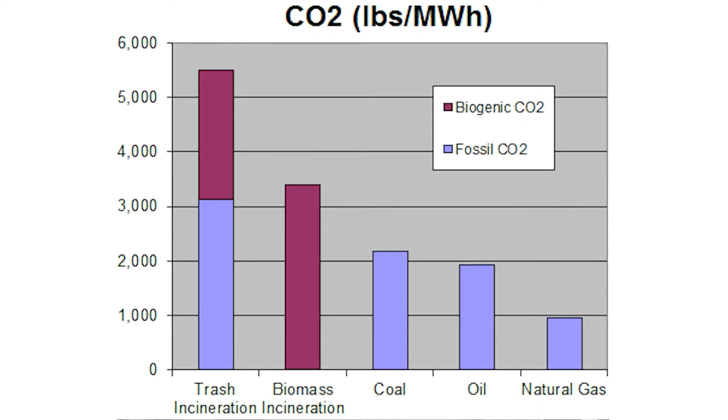I'll be talking about the literature review and design concept process. For the first part, the literature review, we have done some research on articles related to our project. Andrea Thompson stated in 2014 that in this modern world, 40% of the world's garbage is being burned in open pits, and 40 to 50% of garbage is made up of carbon, which means that carbon dioxide is the major gas emitted by trash burning, and we know that carbon dioxide is very dangerous for our environment.

He also stated that trash should be burned in an appropriate manner, and if possible, it should be burned in a way that can be useful, such as burning it to generate electricity for human use.

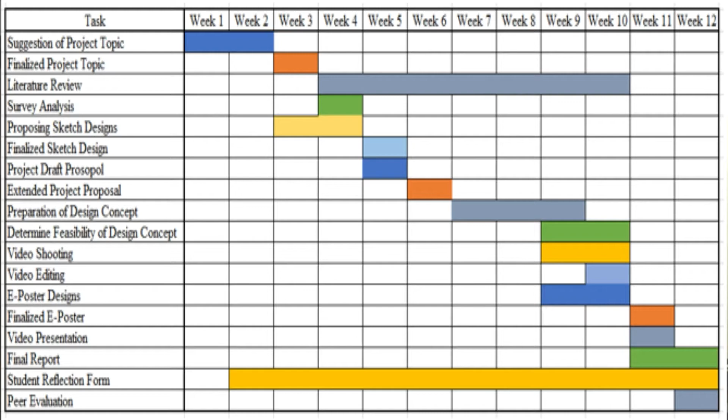So, for the project planning part of our ETP, our group leader suggested that we divide the tasks amongst ourselves according to our strengths and weaknesses to ensure smooth workflow. The tasks that were distributed among us are as shown. We also did a Gantt chart. This is to ensure that everything can be done on time, and it is proven because all of the things that we had done are on point with what we had planned.

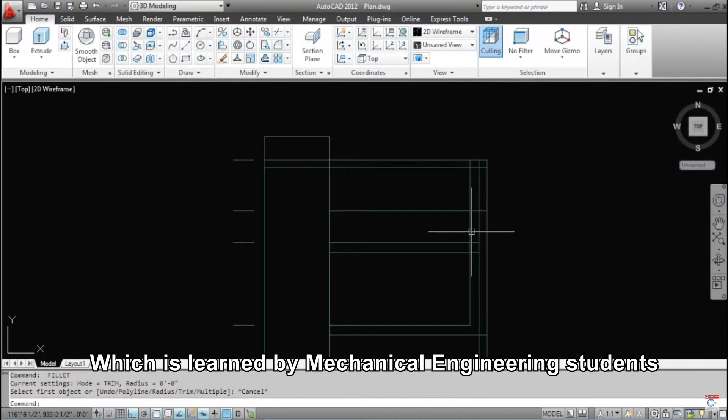For the design concept process, we started by sketching it on a piece of paper so that we could allow modifications and features to be added into the design. After we came up with the full idea of the design for our product, we used AutoCAD software, which is learned by mechanical engineering students, to make the design in a three-dimensional view. By doing this, we allow other people to understand our product better because AutoCAD allows the user to see the product overall in a 360 view.

For the animation part, we used Adobe Illustrator and Adobe After Effects, which helped us make a video for a better understanding of how the product will work. Thank you.

I will be talking about the methodology of the clean trash cookstove. A certain amount of trash will be put into the combustion chamber, but trash made of rubber will be excluded as it will release very hazardous gases when burned. This trash will act as the fuel. After that, a match or a stove lighter is used to start the combustion, and the oxygen is gained through a funnel that will also act as the filtration system.

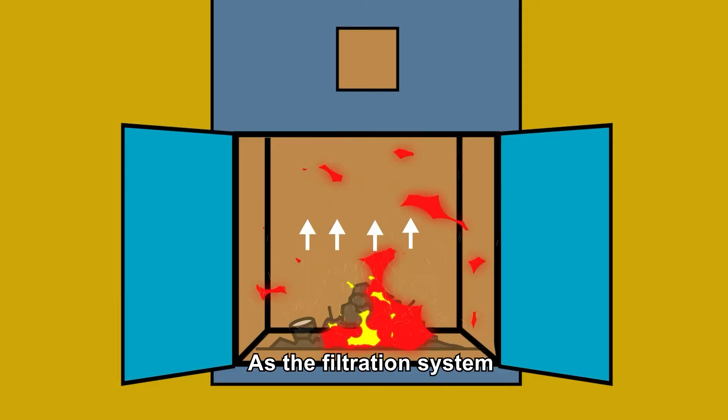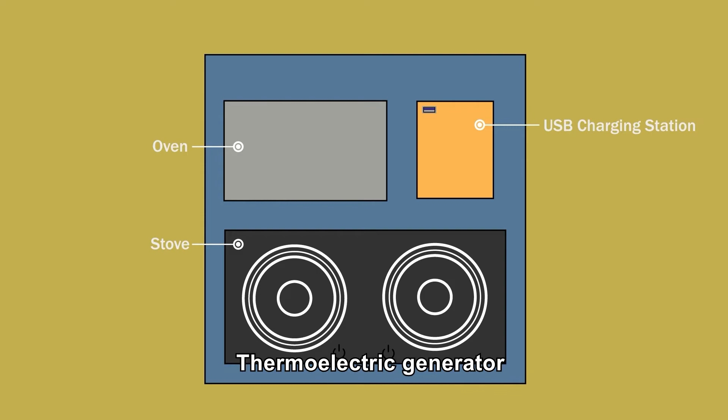The second part is the heat conduction. Heat conduction is one of the ways to transfer heat. The heat generated by burning the trash will be transferred through the copper medium to the stove, mini oven and also the thermoelectric generator. And all of these three components can be used. When a component is not in use, an insulator will be put between the conductor and the component to stop the heat transfer from continuing.

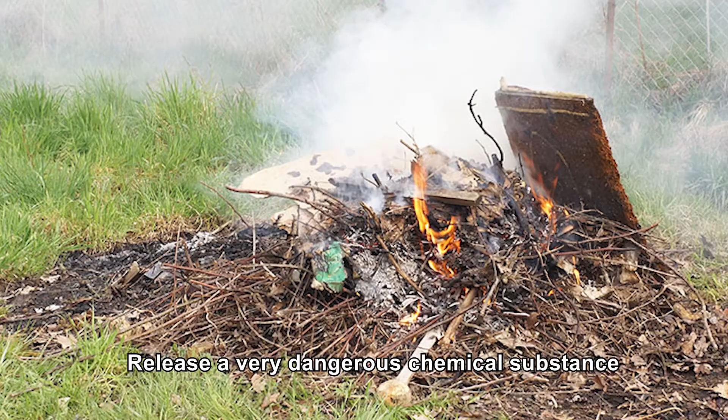And the last part will be the filtration system. As we all know, burning trash will release very dangerous chemical substances and also hazardous gases that will be quite dangerous to the environment. Therefore, this stove is equipped with a HEPA filter and also an activated carbon filter that can help filter the smoke.

As we know, there's an increase in waste production every day, and this waste will cause pollution. Burning this rubbish won't help either because then it will cause air pollution. Our product, the Clean Trash Cookstove, has many functions, such as heating using a stove, oven, or even charging our mobile devices. However, the main goal of this product is to be able to remove any waste products by burning them without any consequences, such as air pollution.

This will not only help reduce waste pollution, but also reduce any harmful gas emissions to the surroundings. These goals are in compliance with the Sustainable Development Goals, such as affordable and clean energy, as well as responsible consumption and production.

With this, we have made a survey for all the users to give us feedback on our product. And as you can see, the users strongly believe that this product can help in achieving a cleaner environment. This will also help to spread the awareness on the ongoing environmental issues, and the Sustainable Development Goals, which help deal with the issue and protect the planet.

To conclude, the CTS54 is a product that is generally made to make the world a much more sustainable place by reducing the waste that is available in the world. All of the chosen materials that were used for our products were based on a Google survey that was conducted and identified to be the most cost efficient for our product.

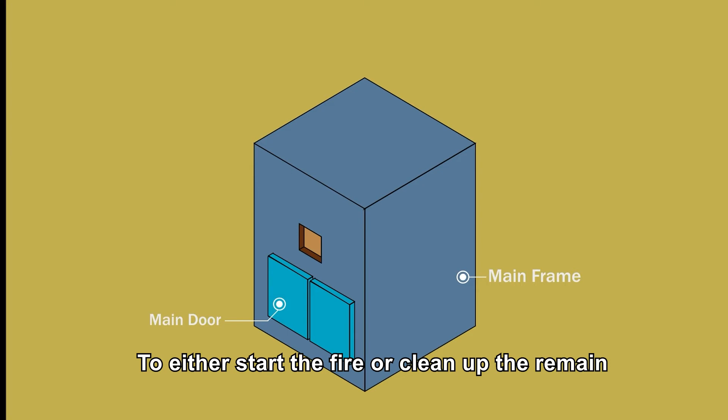There is also a trash hole whereby additional rubbish can be put into the combustion compartment. Next up, there is a stove, an oven, and a USB charging port. These three applications will get the heat energy from the combustion compartment and perform their own tasks. These applications are covered with an external cover in order to keep the heat within the walls to reduce the amount of energy released to the surroundings.

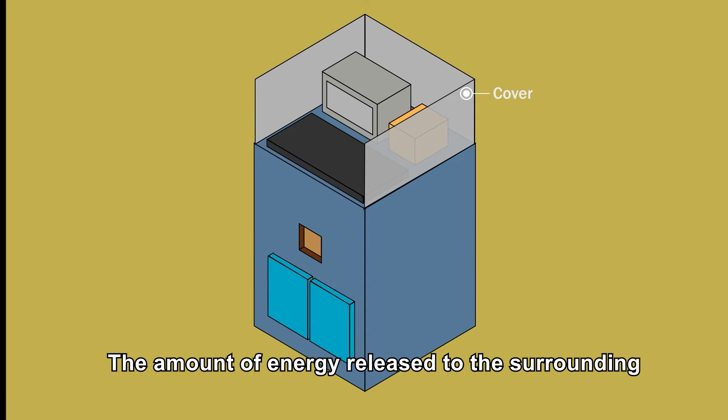Finally, on the back of the cookstove, there is a chimney that will filter the poisonous smoke produced in the combustion chamber to ensure that the smoke released to the environment is not harmful. In order to use the Clean Trash Cookstove, firstly, we need to collect some amount of rubbish and burn it in the combustion chamber. The burning process can be facilitated with a matchstick or any other thing that can make the trash burn. There is no need to worry about the amount of rubbish, as there is a threshold for the user to add more trash if the fire starts to deplete.

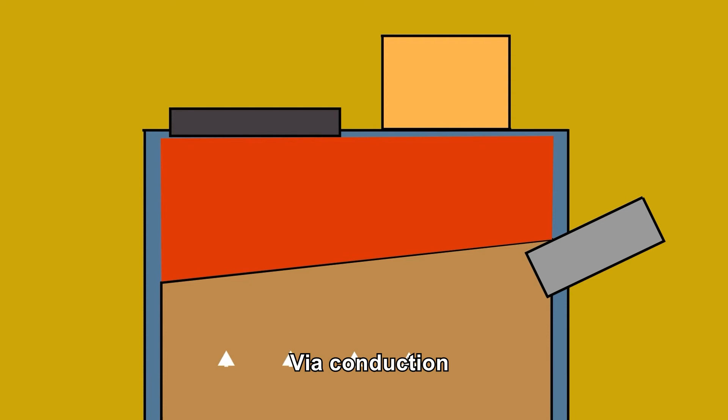The heat that is produced from burning will be transferred to the conductor, which is the copper conductor, via conduction. This copper conductor is used to ensure that the heat generated is not directly transmitted to the application, and also to ensure that the heat is evenly distributed among the applications. There are three applications that can be used when the heat energy is transmitted, which are the stove, the oven, and the USB charging port.

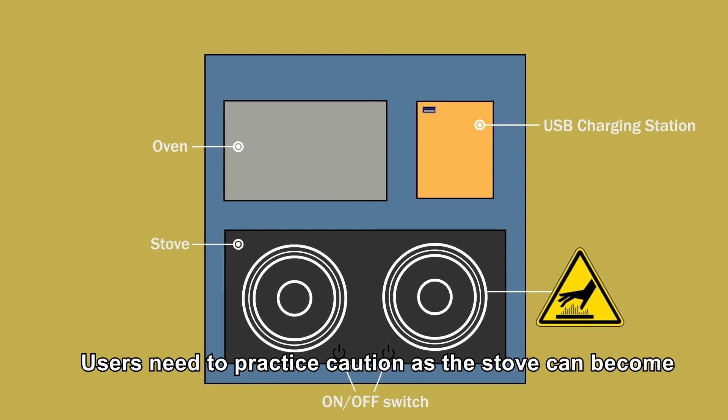To use a stove, we simply need to wait for the burning of trash to start and wait for a few minutes for the heat produced to be channeled into the conductor. After it is done, we simply need to turn on the stove with the on and off switch and start using it to cook our food. Users need to practice caution because the stove can become extremely hot due to the continuous source of heat that is produced. Users can also choose to charge their phones using the USB charging port.

This is possible with the use of the thermoelectric generator. This generator utilizes the Seebeck effect, which will be explained in detail later. Due to utilizing the Seebeck effect, the cover of the USB charging station can be opened to refill the water if it gets warm. This is a cross-section of the generator to help further illustrate this process.

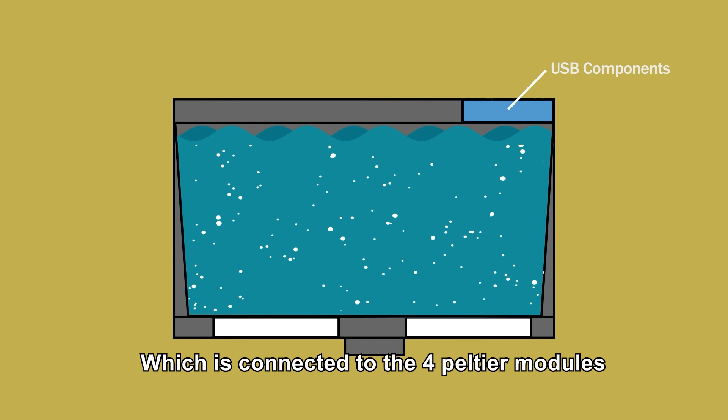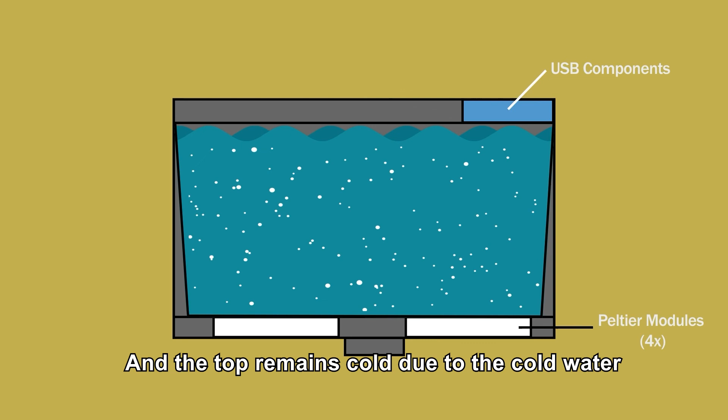At the top right is the USB component, which is connected to the 4 Peltier modules connected in series at the bottom. As the bottom part of the Peltier modules gets hotter due to the heat generated from the combustion chamber, and the top remains cold due to the cold water, there will be a temperature difference. This will then generate electricity due to the Seebeck effect, which is the direct energy conversion of heat into voltage potential.

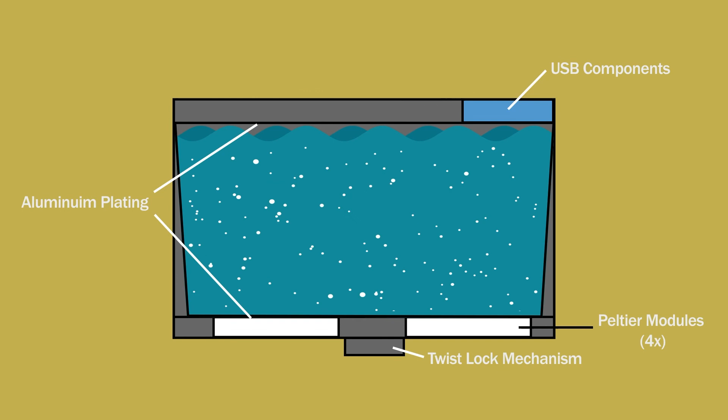An aluminium plating is used to seal the components from getting in contact with water to avoid short circuits from happening. Finally, a twist lock mechanism is located at the bottom so that the users can easily remove the USB charging station to remove the water and refill it.